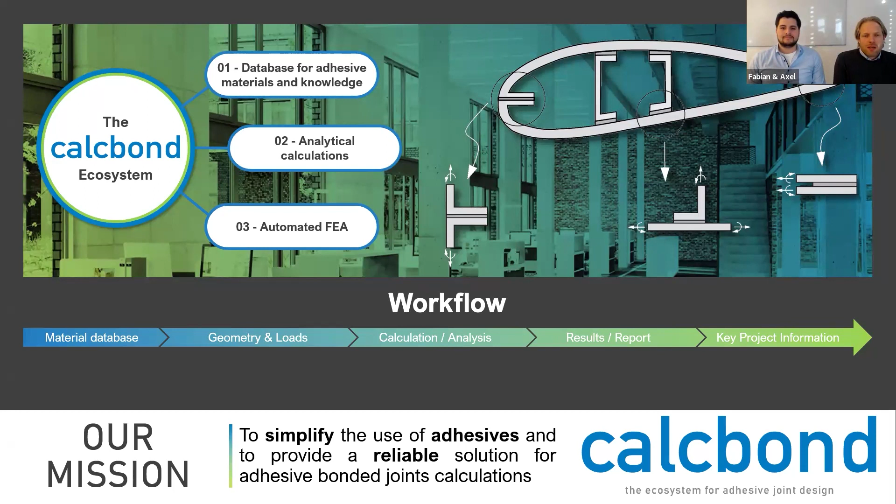Before we go into the live demonstration, just a brief introduction about the Analytical Toolbox itself. This is the basic calculation feature of calcbond. And let me give you some brief preliminary information. So in general, the question is, of course, how can I calculate adhesive joints? If you've been with us in the first webinar a month ago, you know that there are numerical simulation possibilities using the finite element method. But before that, you can also use basic hand calculations or advanced analytical formulas, which represent closed mathematical solutions for very specific cases. So this is possible for any general structure, but also for adhesive joints.

And there you can calculate your adherend and adhesive layer performance, for example, in terms of strains and stresses acting under mechanical loading or also other loads. And these always come with simplification assumptions. So you have a natural limitation of the applicability of these formulas, but for these certain cases, they can provide direct results based on the math behind that.

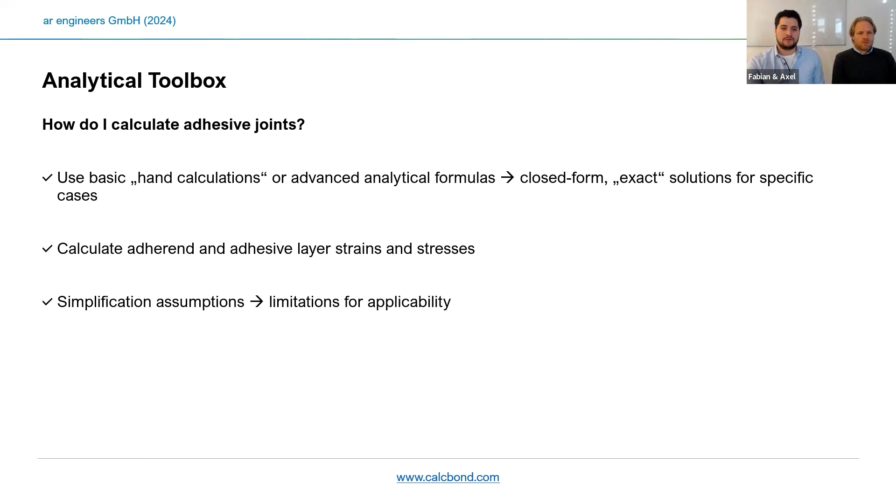But because the governing equations and the problem in reality are very complex, you need to define a set of simplifications that you work with. And when you know these, then you can very effectively work with these formulas. And the benefit is clear. These methods are fast, they're easy to implement, programming-wise also, and they come at a very low computational cost compared to numerical simulation, for example.

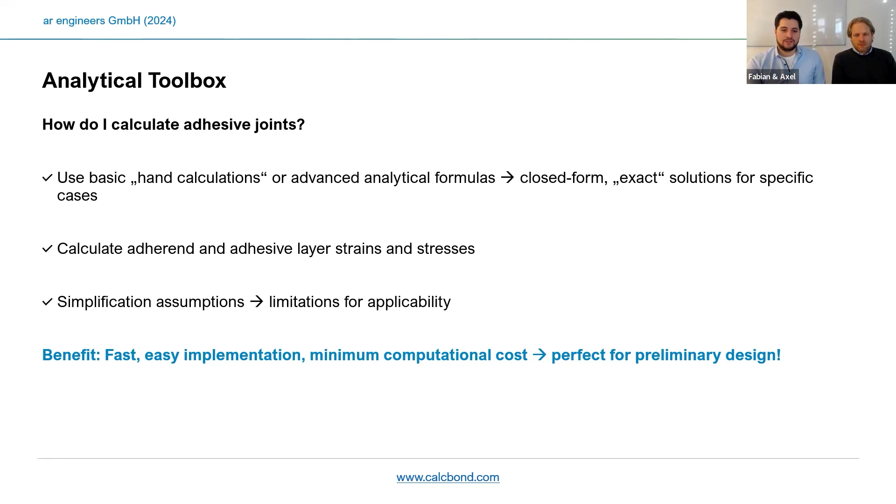So these methods are perfect for preliminary design in your early project phase when dealing with adhesive joints. And that is why we have included some of these tools also inside calcbond, and that we will show you in a minute. So let us go online and try it out.

Perfect. Thanks a lot, Fabian. So I will just quickly change my setup here, and then we can move on into the live presentation. So now you should be able to see... Nice. All right.

The platform here. So when you go on www.calcbond.com, you'll see this first landing page, and we don't want to go into detail with registering. You'll find on our YouTube channel a very short, brief introduction about how you register. It's very straightforward, just a 1 or 2 minute video.

Sometimes it happens, because it's a double opt-in, that you get an email where you have to confirm your email address, and sometimes this will get caught by the spam filter or your local servers. So make sure you get that email, or send us an email that something didn't work, and we help you out. And the moment you have registered, you'll be in a free trial,

and you will start from that index page here. In the middle, you see at the moment an overview with some basic information, some videos that explain the platform itself in depth, and some recent activities further down. If you registered and turned on the newsletter checkbox, you get monthly updates with our latest and recent activities anyway.

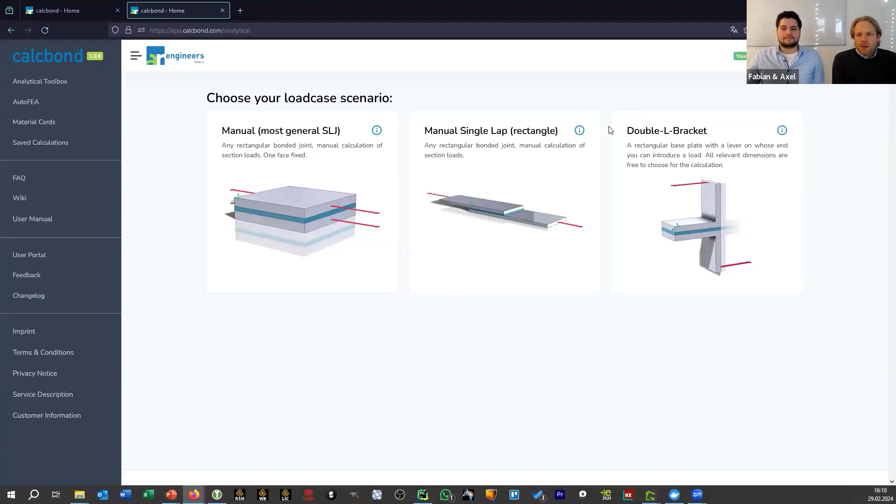So then on the left-hand side, we have our navigation bar. At the top of the bar, you see the Analytical Toolbox, which will be presented by Fabian in a minute. The AutoFEA, as I said, was presented a month ago. The recording is online on our YouTube channel. Check that out. It's very interesting.

And then material cards is a very cool chapter with material cards from Kissling, Sika, Huntsman, and IPS adhesives at the moment. 21 different material cards are online. You can go through all the material cards. Even if you don't do calculations, you have all the necessary information in these material cards, and a contact person from that brand to get in touch with them directly.

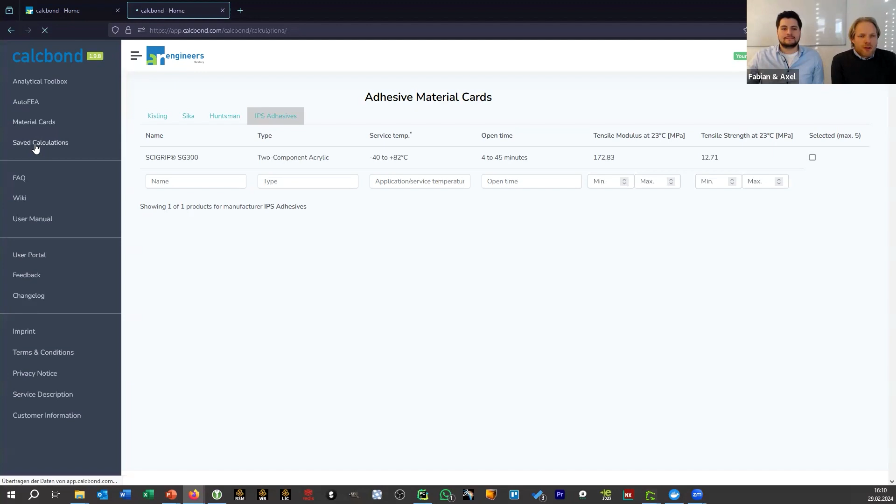The saved calculations area displays all your calculations that you have done and saved. For the Analytical Toolbox, Fabian will say some words about that. You have to actively save calculations. AutoFEA saves every calculation automatically, and you have to delete them actively. So everything that you have calculated will be there.

Another interesting area is our calcbond wiki. That's very interesting for those people who'd like to study adhesive joint design or adhesives. There's a lot of stuff about the platform, of course, how to handle the platform, and how to handle adhesive joint design. Very interesting to get into the topic, or if you're already in the topic, to move further into calculations and how to set them up.

Going back to the platform, I think the user portal is interesting as well, because there you see all the information that you entered when you registered for a free trial for the platform. You can change it here by editing on the left-hand side. On the right-hand side, you see what subscription plan you are in.

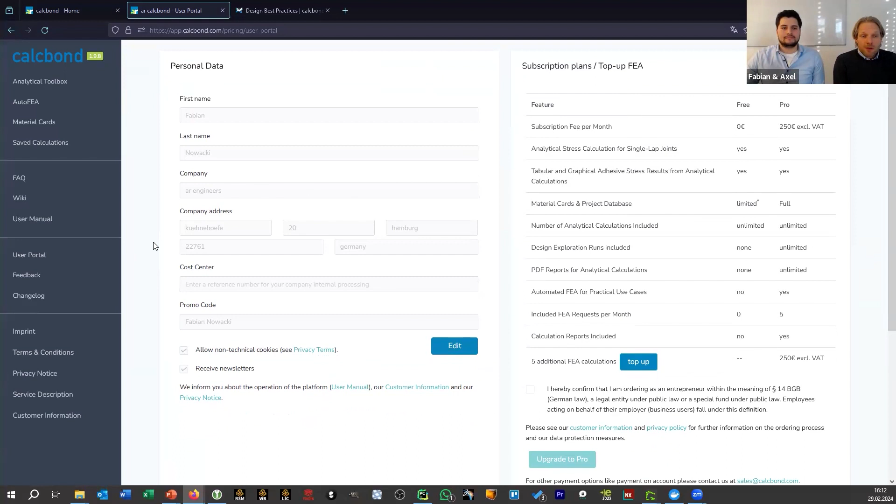So whether you're free or pro, and you see what cost would come up if you become a pro, or if you have used all your FEA tokens, you could top up and get some extra calculation power. That's on the user portal side. If you go further down, there's some legal information about terms and conditions and so on, not too important for the moment. So I would hand over to Fabian and let's go into the analytical toolbox.

Thank you very much, Axel. So today we want to look deeper into the analytical calculation capabilities in calcbond. And as I explained earlier, these are mathematical formulas to solve specific cases of adhesive joints. And a very common bonding case is a single lap joint with basically two rectangular plates bonded together.

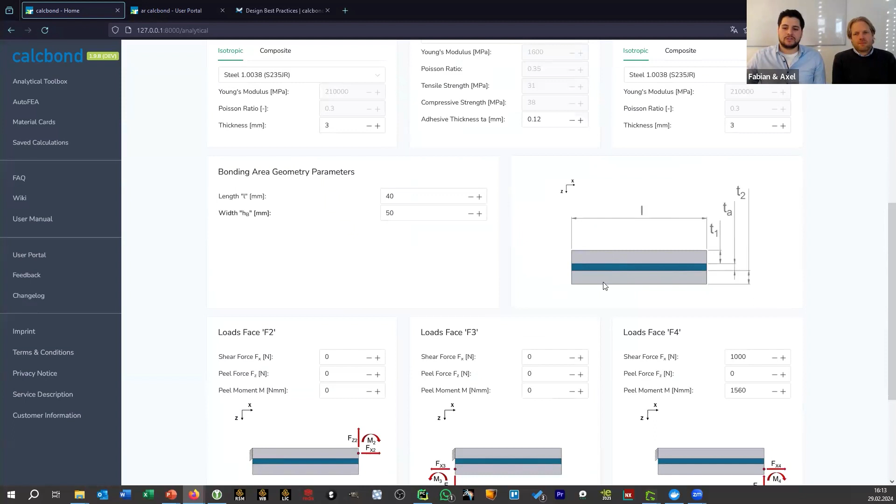And as you can see here in these three different configurations, we have provided the typical lap shear specimen, so to speak, in the middle, but you could also go for a more generalized single lap joint. So it is kind of an adhesive adherend sandwich with custom capabilities of adding the different section forces and moments if you want to dive deeper into your specific loading scenario.

You can also select the typical single lap shear specimen. You can either calculate it as a lap shear specimen, or also, if you want to, you could enter transverse forces or moments, which will then switch the boundary conditions automatically to come up with an equilibrium for these reaction forces on the other side of the adherend.

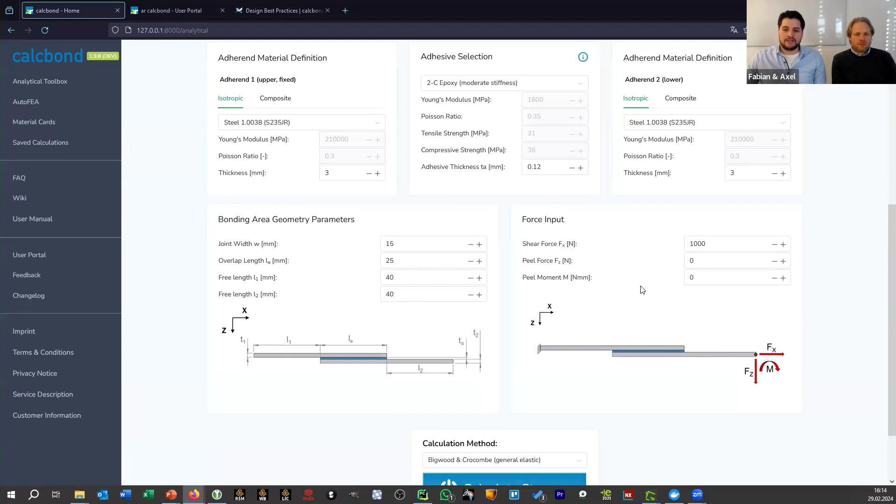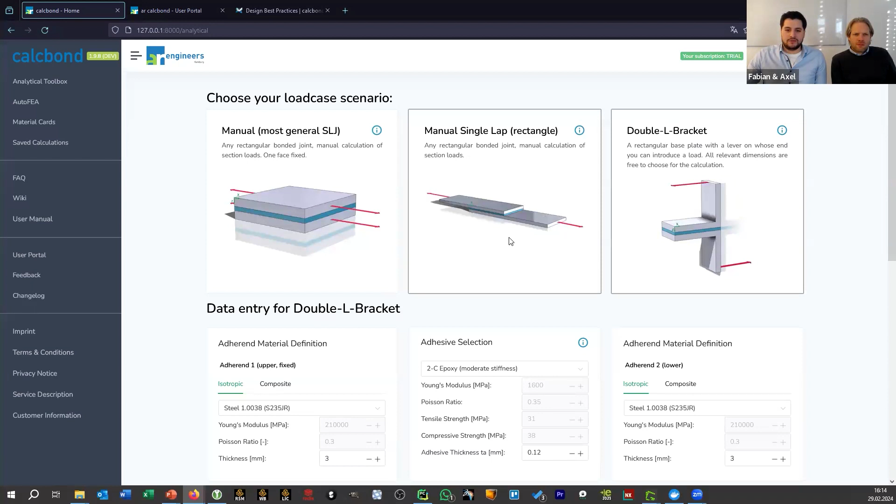Or, for example, the double L bracket we have also as a specific configuration, if you have these kinds of profiles bonded together, so that simplifies your workflow a little bit. So in this demo today, I want to show you the possibilities using the typical lap shear geometry here. So scrolling down, we have the user interface with the different input boxes considering the adhesive joint definition.

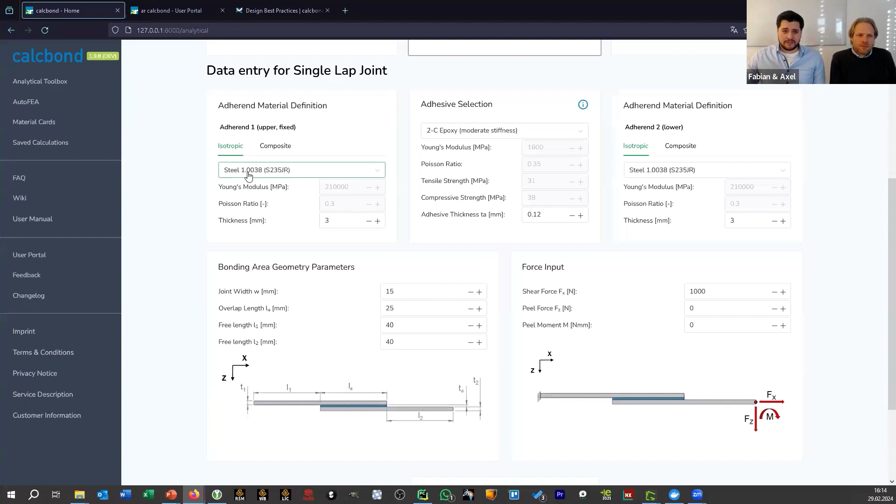So on the upper side, we have the data entry for the adherend materials. On the top left box here, we have adherend 1, which would be the upper adherend in this drawing. On the right-hand side, we have the second adherend, the one on the bottom. And for both adherends, you can define an isotropic material from a predefined list of engineering materials that we have available in calcbond: different steel, aluminum alloys, plastics, titanium, glass also. So you can select one of these, and you can also select a user-defined material where you would be able to enter your own engineering data.

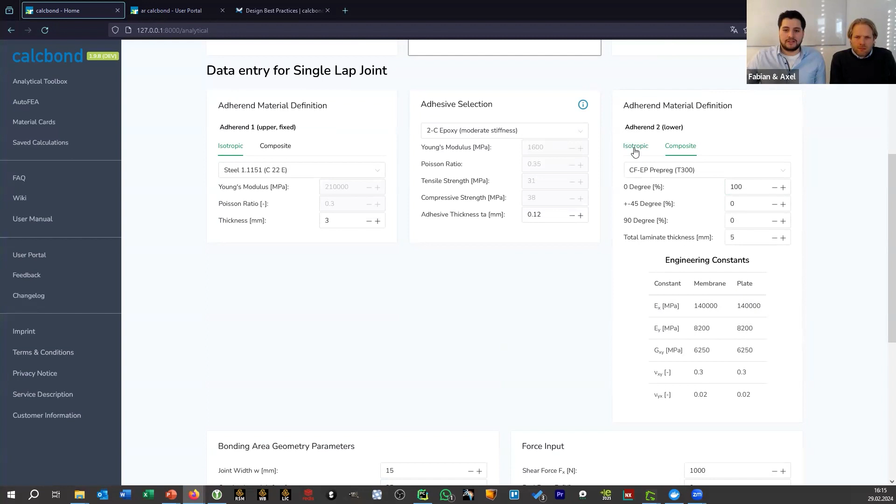In this case, for the analytical calculations, it's quite simple. You have the Young's modulus, your Poisson ratio, and then, of course, the thickness of your adherend itself. You could also define a simple composite layup. So if you have an orthotropic adherend, you could define your laminate stack up, and then calcbond would calculate the effective stiffness parameters that have an influence on the calculation results. But in this case, let's stay with the simple isotropic materials. Let's set up a symmetrical joint with steel alloy, 3 millimeters in thickness on both sides.

And in the middle, we have the adhesive selection. So here we have a drop-down list with predefined engineering data for manufacturer-specific products provided inside the calcbond material database. If we select products, we can see the different engineering data being put inside the fields here. Or again, I could also define my own custom data. And again, these are simple properties like the Young's modulus, tensile strength, compressive strength, and the layer thickness, of course. So let's say I want to calculate with an adhesive layer thickness of 0.5 millimeters and take these generic values for my user-defined input.

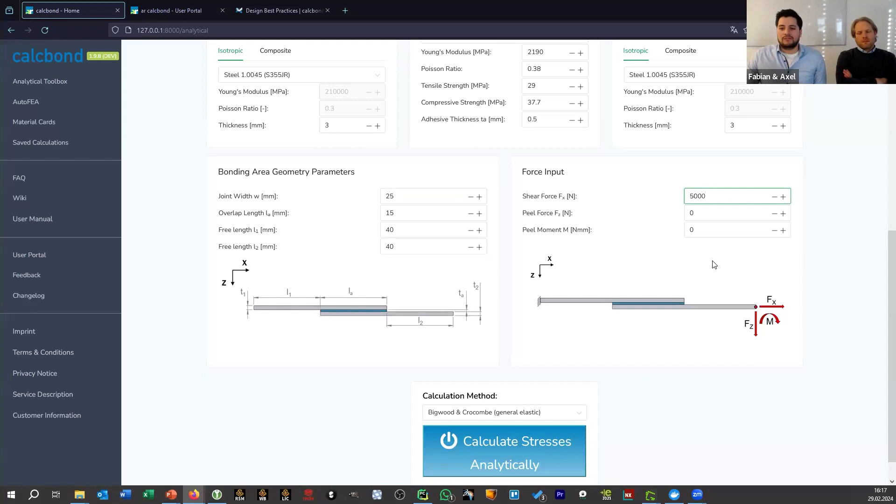Then on the bottom left-hand side in the box is the geometry. I want to define a joint width of, let's say, 25 millimeters, an overlap length of maybe 15, and I will keep the free lengths of the adherends symmetrical. And then let's say I want to transfer a load of up to 5 kilonewtons. I can then calculate the stresses by clicking on the blue button. And within a snap of a finger, I get my results back inside the platform.

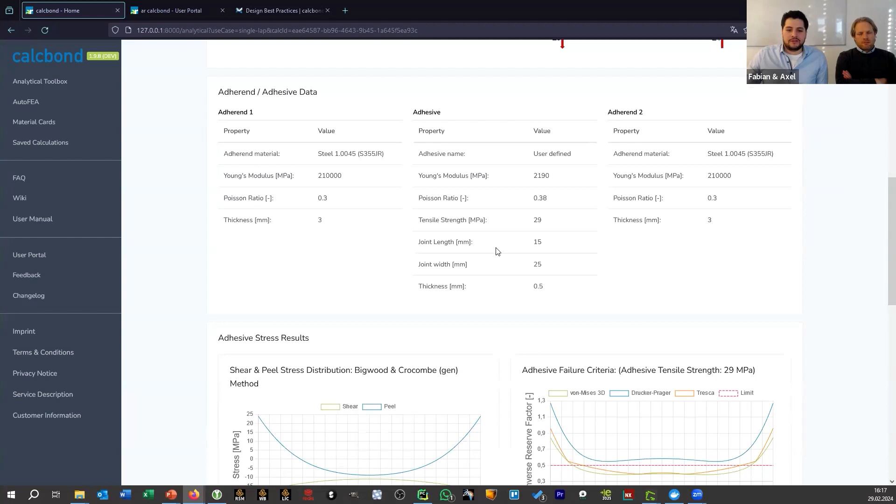So here I have an overview of the acting member forces and of the material properties of my joint definition. And scrolling further down, I have my adhesive stress results. What is important to note is that the analytical formulas go beyond the simple assumption of an average shear stress being distributed in this type of specimen, because they calculate a differential shear stress distribution along the bond line. So we have these coordinates going from 0 to 1, representing the left edge of the bond line towards the right edge. And we see the green line here, we have a variation in the shear stress with peaks reaching their maximum at the free edges of the bond line.

And also we have peel stresses induced by moments as a result of the asymmetrical load introduction from the thickness offset of the joints. And these stress components are calculated inside the adhesive layer and then are transferred into a failure criterion, which we see here in the box on the right. So this basically predicts the cohesive failure of the adhesive layer itself.

We do not calculate any interface behavior in calcbond because it is basically not yet really possible to define formulas for that. But for the cohesive failure, there are different methods where it's possible to roughly predict the expected failure threshold. And for this, we have so-called equivalent stress approaches. So we have a set of different equivalent stress models like the von Mises three-dimensional equivalent stress, Drucker-Prager, Tresca, which are differently suitable for different types of adhesives.

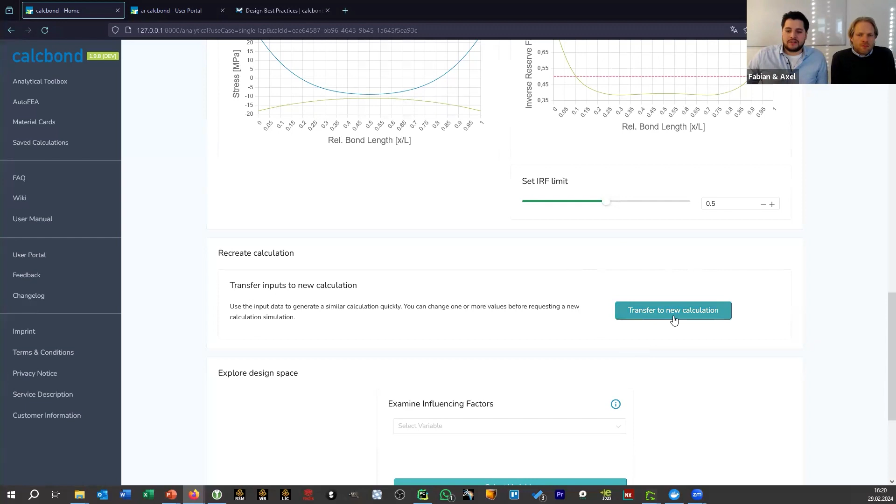And if you want to conduct a similar calculation, but don't want to enter all the data again, you can click on the Transfer to New Calculation button here. And then you get a new setup with all the previous information saved. And then you can just do some small adjustments. So let's say we want to change the first adherend to an aluminum alloy. Maybe we want to change the thickness. Let me do that again.

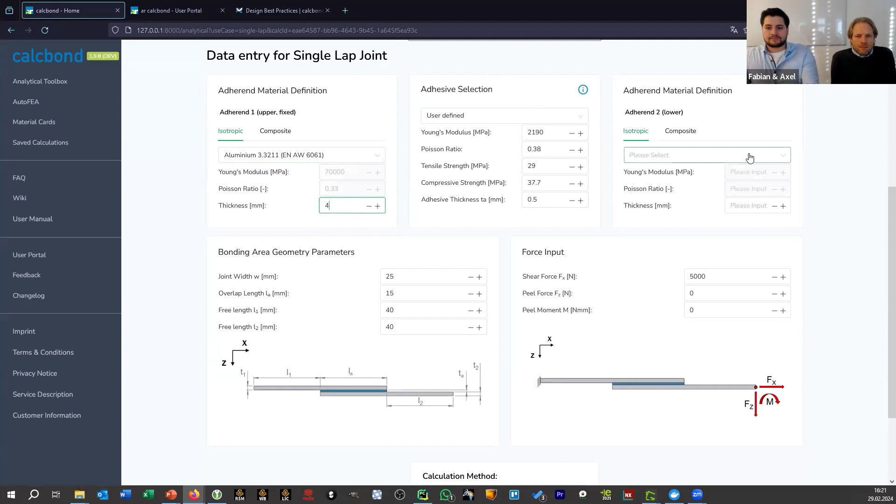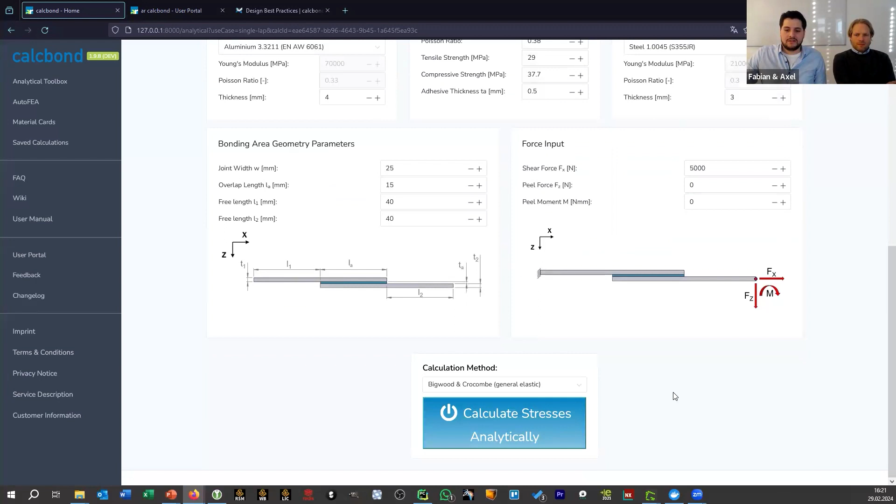Yes. So we have the steel alloy as the adherent material on the right with 3 millimeters thickness, and we have 4 millimeter thickness on the left with aluminum. So we have an asymmetrical joint configuration, and I'm keeping the forces as they were. And if I calculate again now, I can see a slight asymmetrical distribution of the stresses. Maybe I can give it even a little bigger push just to make it more clear.

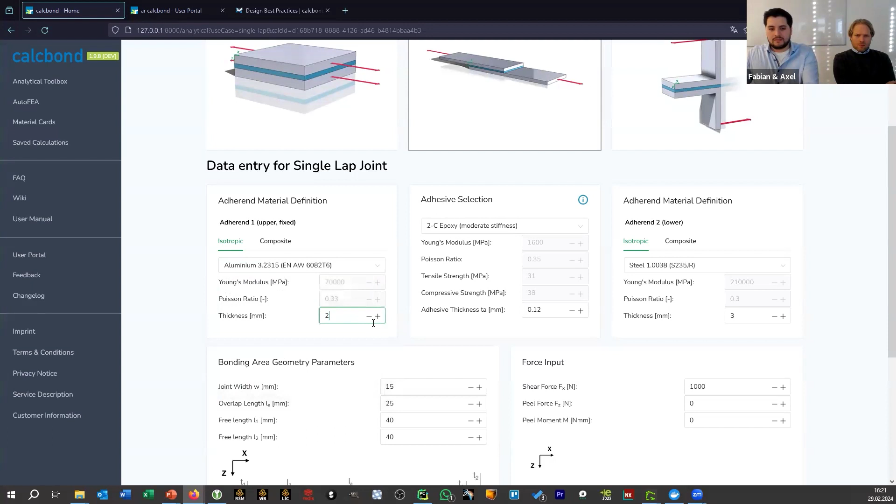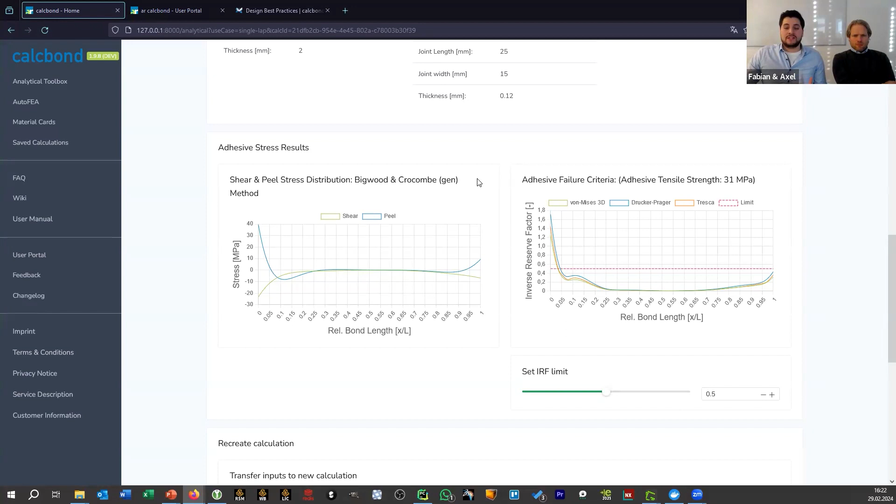Yes, so this would be an extreme example of a very thin bond line and largely different stiffnesses of the adherents. And then we can see how they influence the asymmetrical distribution of the stresses within the adhesive layer. So this is a very powerful capability of the CalcBond analytical tool, that you get to learn about these influences of your design parameters on the adhesive layer strength performance.

And if you want to go a step further, and let's say perform a design study where you have a large design space and want to quickly investigate how different parameter variations influence your joint performance, you don't have to do 100 or 500 different calculations manually yourself. You can use the design space exploration feature, which is in the box below your Transfer to New Calculation button. And here you can select different variables.

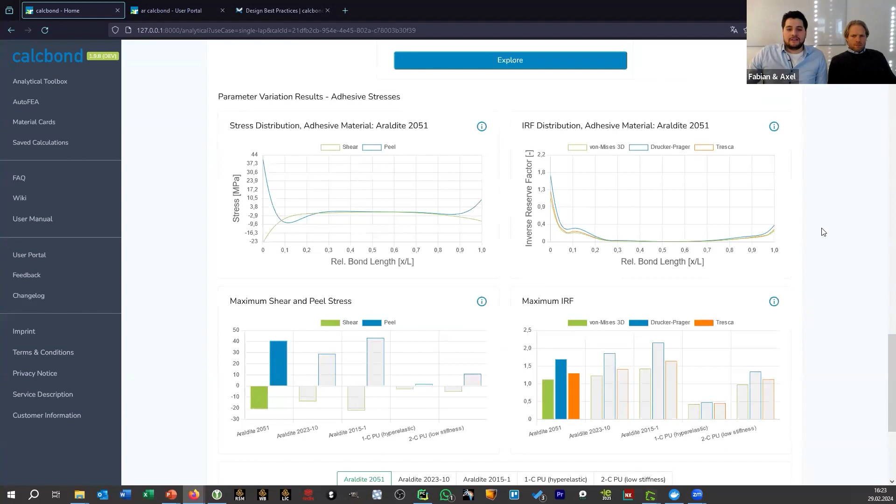We have, for example, adhesive materials, so you could select different products to compare the different mechanical properties. And then you would click Explore for the given configuration that you have calculated before. And then you get this overview here. So in this matrix, you have the top left and the top right as a result interface, just the way you saw it before. But on the bottom, you have two new boxes, and these boxes show you the comparison of the different variations.

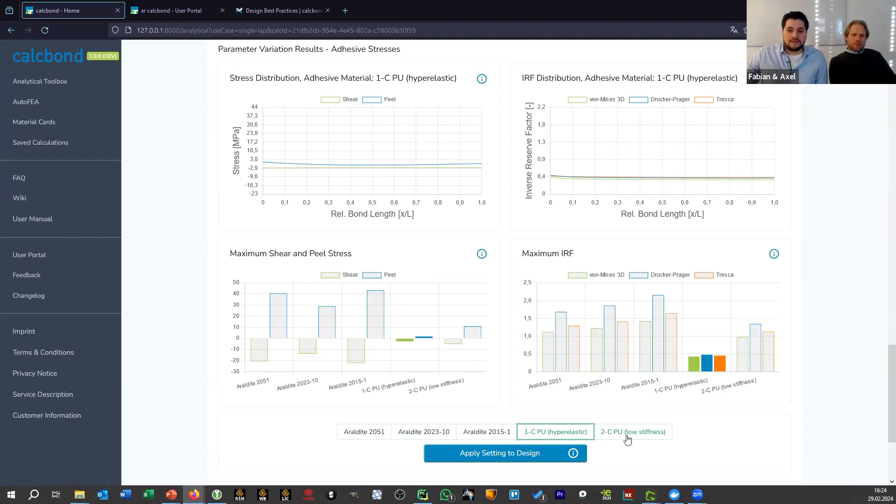In this case, we have discrete variables, so we have 5 different products that we can compare. And if I switch through the tabs here at the bottom, I can see the bar charts changing, highlighting whichever parameter I'm looking at right now. And if you look at the top left and the top right graphs, you can see how these dynamically change in between your design parameters. So here you can have a direct comparison and see how they in a different way affect the stress distribution.

So this would be for different types of adhesives, but maybe I want to see, okay, what influence does my joint length, so the bond line length, have? Let's say I want to calculate from 0.3 millimeters to, sorry, not thickness, that's a bit short. Let's say I have 15 millimeters in the length up to 150.

Click on Explore. And now I have the same thing, but now I have a continuous design space, so I can move this slider here from my bottom limit, 15 millimeters of joint length, up to 150. And here I can see on the top how the stress distribution varies. And I can also see that the maximum values do not really change that much.

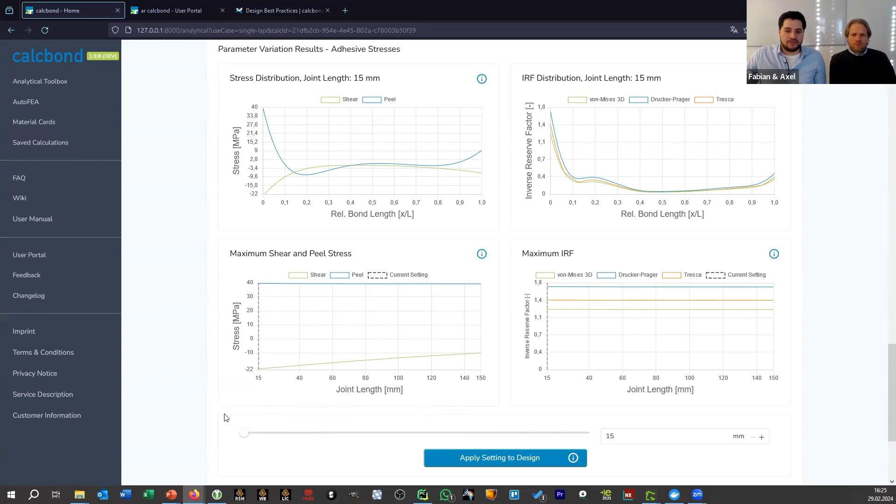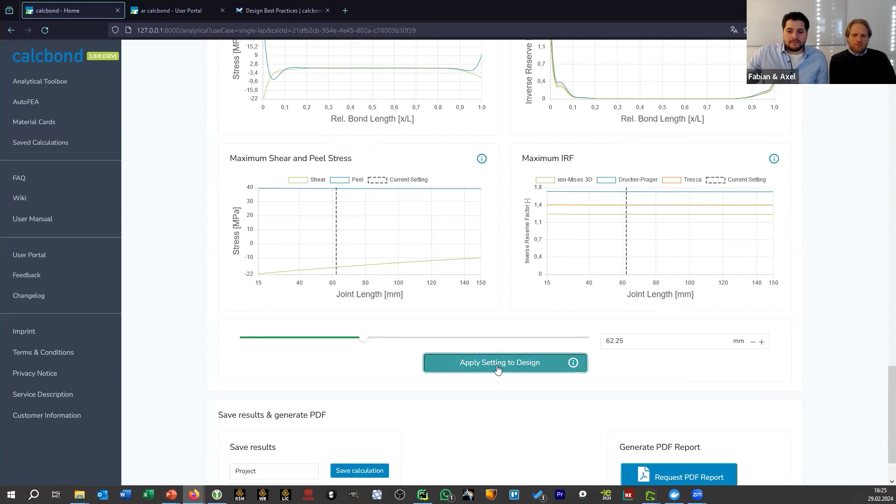So that's also a very interesting learning, which actually proves itself in practice, that you don't need to extend your joint length infinitely to improve the strength, but there are other measures that are more effective to improve joint strength. And that is how you can find it out, by using this Design Space Explorer. And if you want to have one design, you can apply it, get your normal result illustration here.

And then if you want to save your calculation, you can do so in the bottom left, where you can save your result, let's say webinar demo 1. Then you can save the calculation and it'll be saved in your user account in calcbond. So you have the analytical calculations table, and on the bottom here from today, from the webinar, you can have your demo project. You can click on the pencil and change the name if you want to.

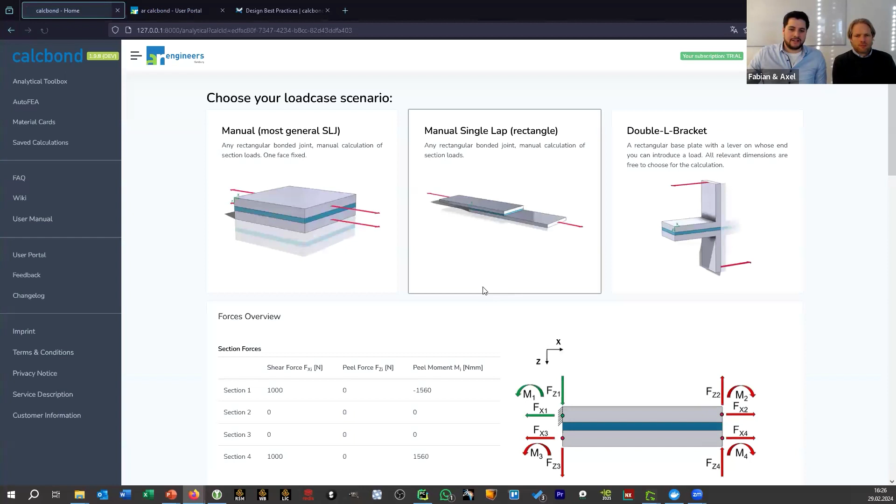You see the date, and you can request your PDF report. You can do it here, or you can also do it inside the calculation object. So going down to the bottom, on the right-hand side, we have the Generate PDF Report box with this blue button. And once it's clicked, an automatically generated PDF document will be made available for you, which you can view in your browser, or you can save offline, of course.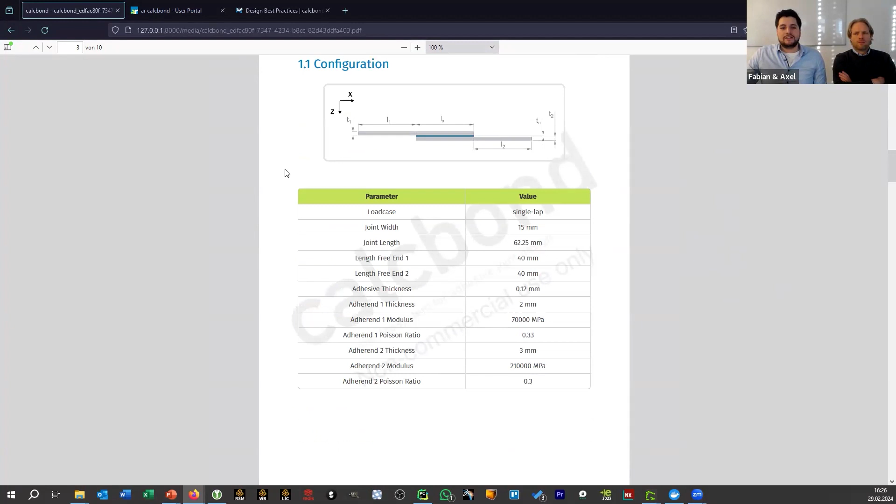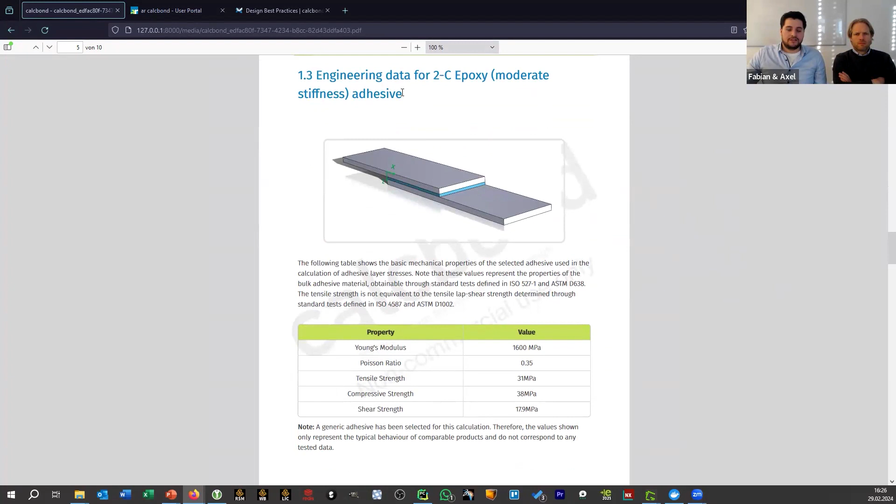And it's nicely laid out with the cover page, all the important information, an interactive table of contents, so you can jump to the different chapters. And here you have an overview of your joint configuration, the loads, the material data. In this case, we have a generic 2-component epoxy with default values, but you would also be able to have manufacturer-specific properties listed here with a link to the products.

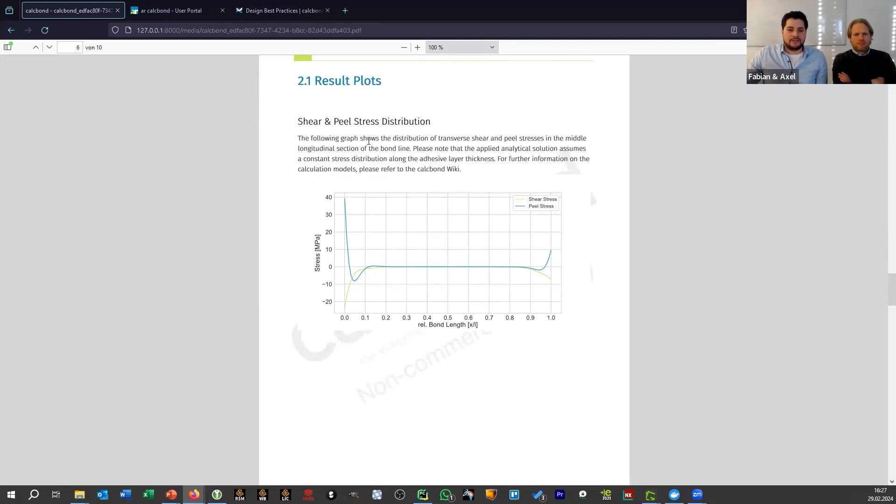And then you have your result plots of your analytical calculation, in this case, which you've seen online, with some more explanation text for you as a help to understand how to interpret these results in terms of the analytical calculation methods. The same with the inverse reserve factor, so the equivalent stress approaches as a strength prediction.

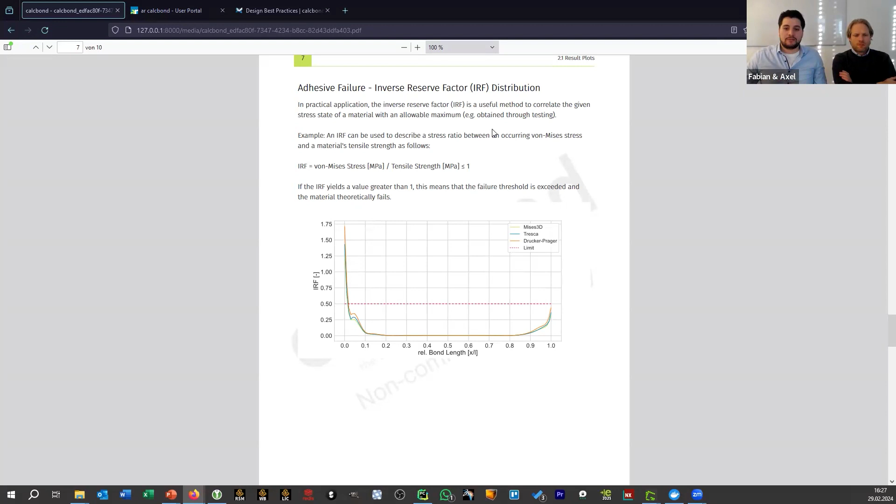Table as a summary. So in this case, we would exceed the expected tensile strength. That is why you have the red values above 1.0 here, because you have the allowable IRF of 0.5. So if you would say you have values between 0.5 and 1, they would also be red in this case.

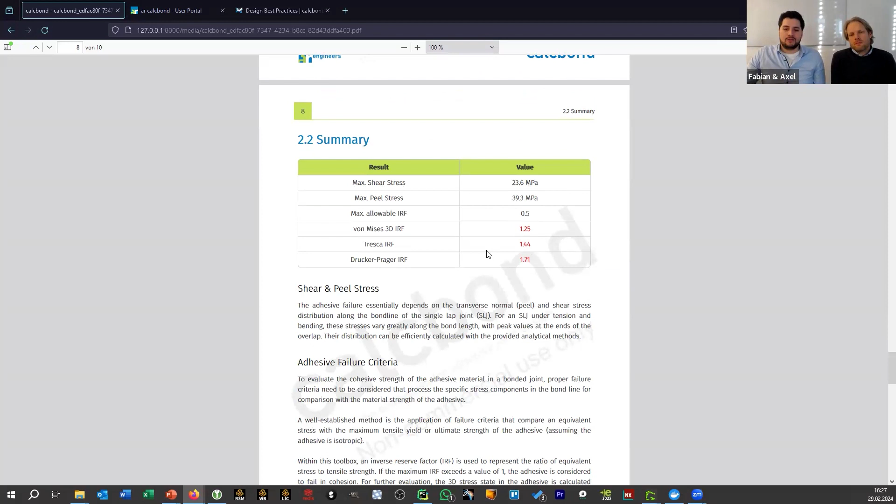And then after some general information text blocks, on the last page on the back matter, you have some important links toward the platform. You can go to the wiki, to calcbond directly. You have a unique calculation ID, which is saved inside the database.

So here you have a QR code available and also a digital link, which sends you back to calcbond to this specific calculation object, which you can also share with colleagues. So if they're registered in calcbond, they can click on the link and access this calculation object directly or scan it via their smartphone or tablet, for example.

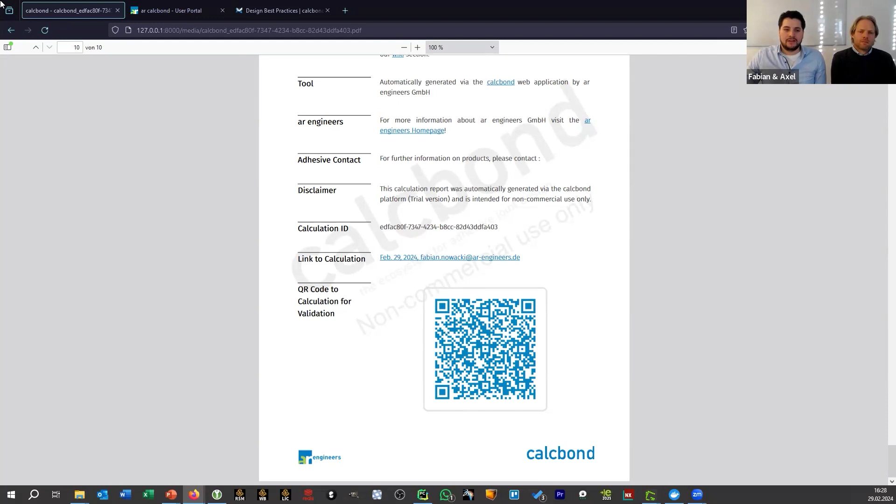Okay, so that's it about the analytical toolbox in brief summary. And moving back to the presentation, I want to show you some more developments coming up in a second. So let me share the screen again. And now moving on, we want to know what's coming up in calcbond further down the road this year.

The first big feature extension will be the material cards database, now you should be able to see it, sorry for that, in terms of user-defined material cards. So in addition to the manufacturer-specific product being listed inside the calcbond database, you as a user will be able to enter and save your own tested values independent of the default material data in calcbond,

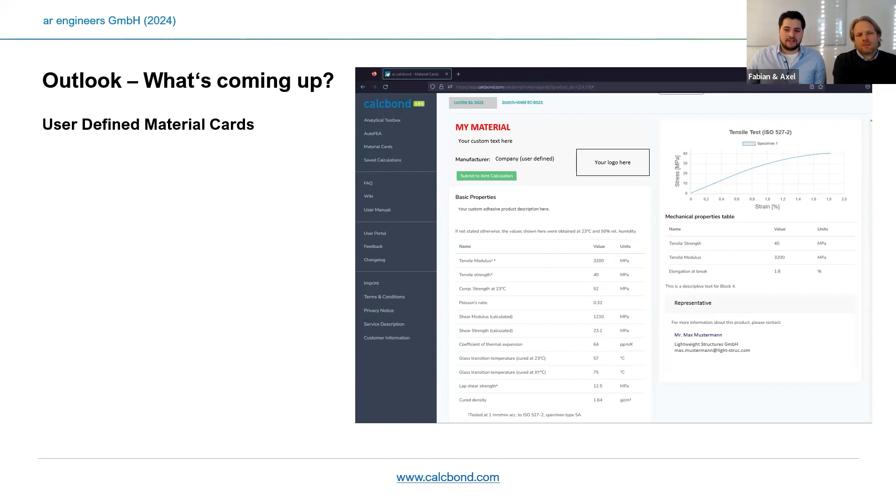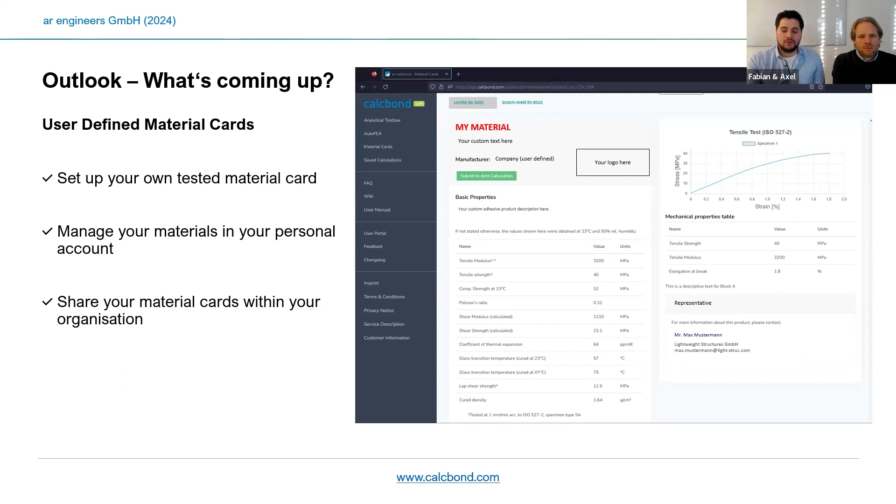and you can manage it inside your own account and also share it with colleagues inside your organization or also with people outside your organization if they are registered calcbond users. And you always have full control over who has access to the data and who can manipulate it also.

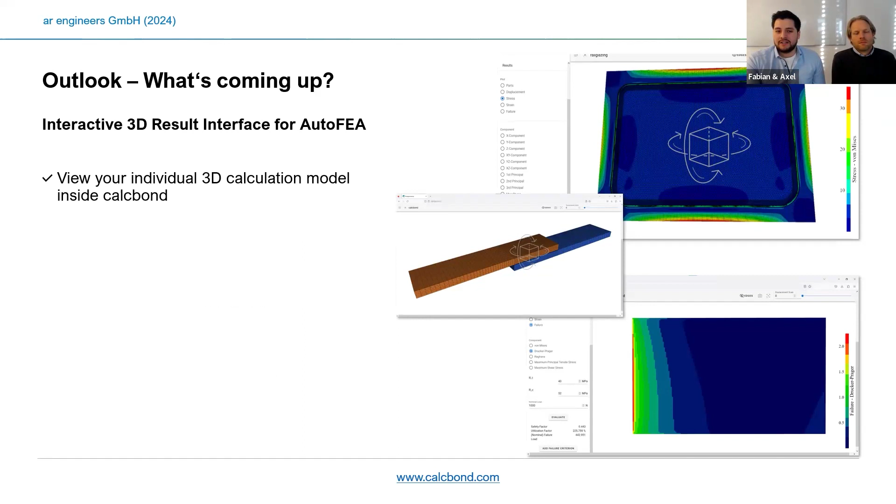Another big feature is the 3D interactive result interface. So here you have a more interactive three-dimensional interface inside the AutoFEA module where you will be able to view your model in 3D, show and hide different components, move and rotate everything, zoom into them to get a more detailed analysis, have extended result types available, more different failure criteria for the adhesive layer assessment.

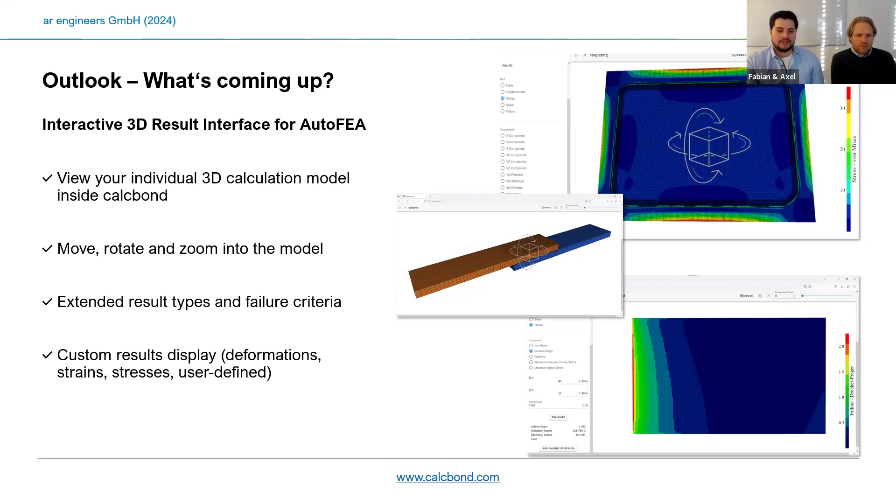And also, if you're more familiar with stress analysis, you'll be able to enter your custom result criteria and display them the way you want them, basically, and make them available for your own PDF report.

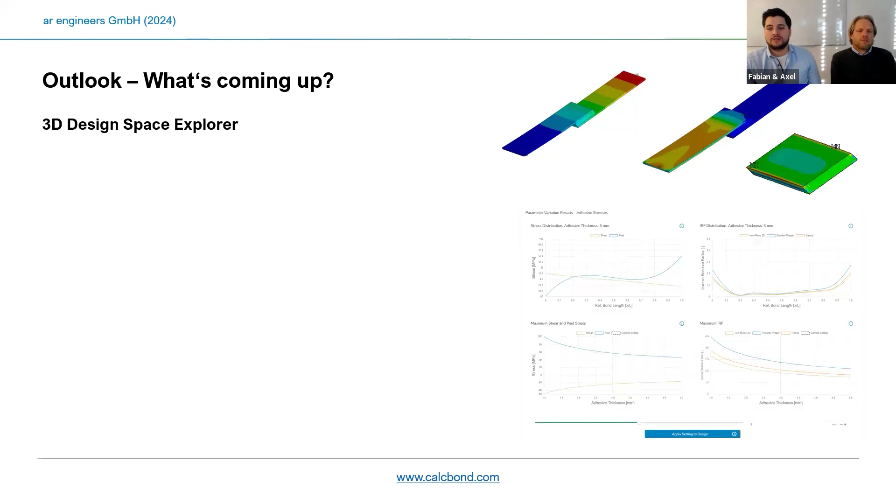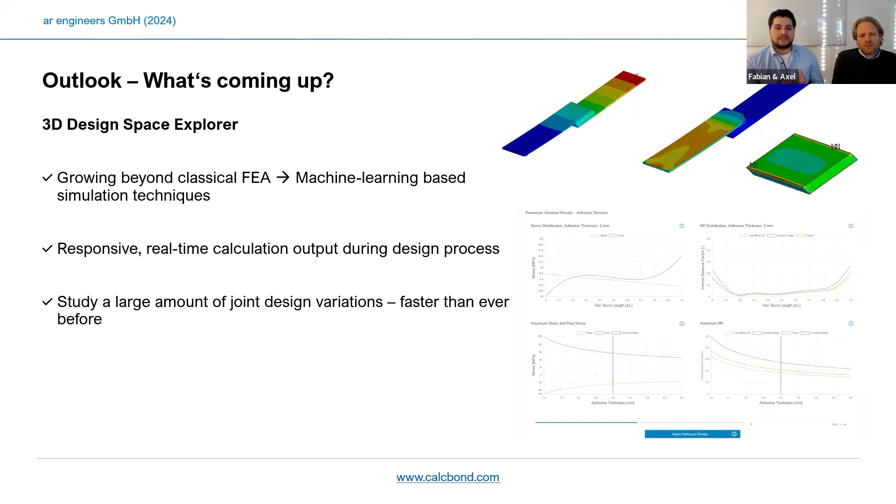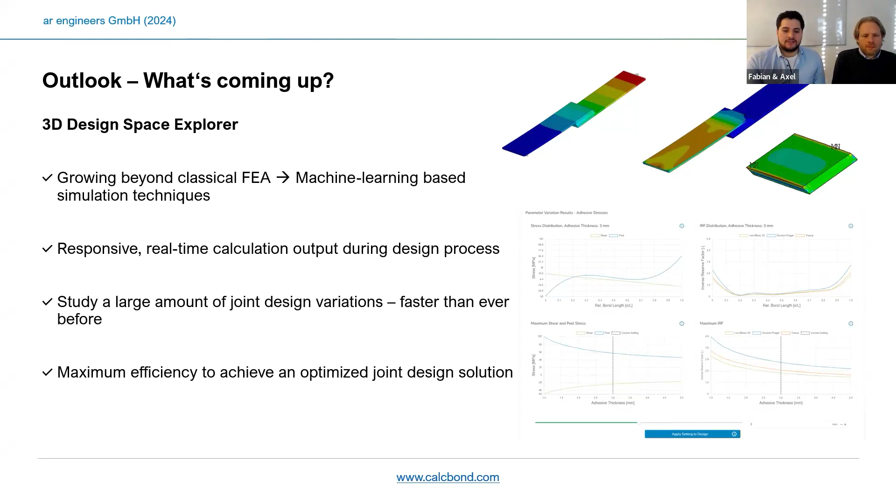And finally, similar to the design exploration in the analytical feature, we also want to provide this for more complex joint geometries in 3D based on FEA, but also going beyond classical FEA with, for example, machine learning-based algorithms. And this will provide you with responsive real-time design calculations and parameter studies, basically. So you will be able to study a large amount in a very short time and therefore get a very large boost in efficiency to reach early on project decisions with minimum effort.

Okay, that's it from me so far. Now giving back to Axel. Thank you a lot, Fabian. I personally believe the Analytical Toolbox, as well as especially the Design Explorer, is a very powerful tool within calcbond,